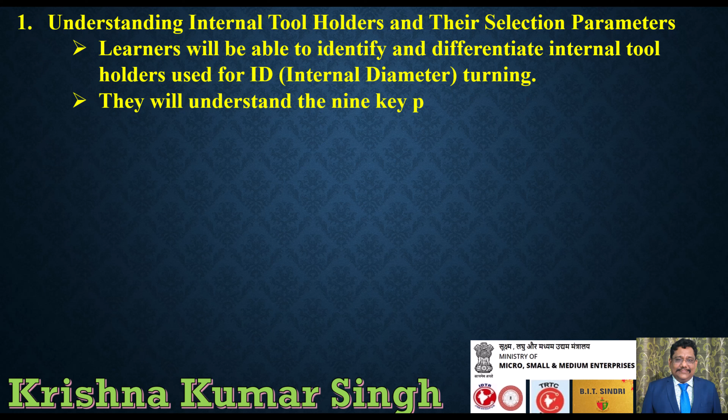Outcomes of the lecture on internal tool holder selection and insert grades. Understanding internal tool holders and their selection parameters. Learners will be able to identify and differentiate internal tool holders used for ID, internal diameter, turning. They will understand the 9 key parameters involved in selecting internal tool holders.

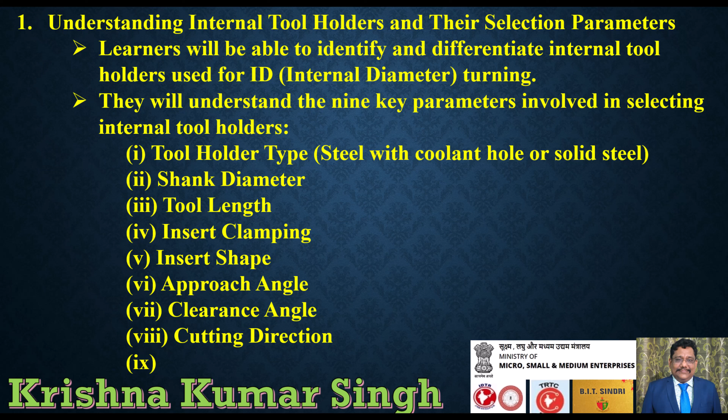The 9 parameters are: 1. Tool holder type, steel with coolant hole or solid steel. 2. Shank diameter. 3. Tool length. 4. Insert clamping. 5. Insert shape. 6. Approach angle. 7. Clearance angle. 8. Cutting direction. 9. Cutting edge length.

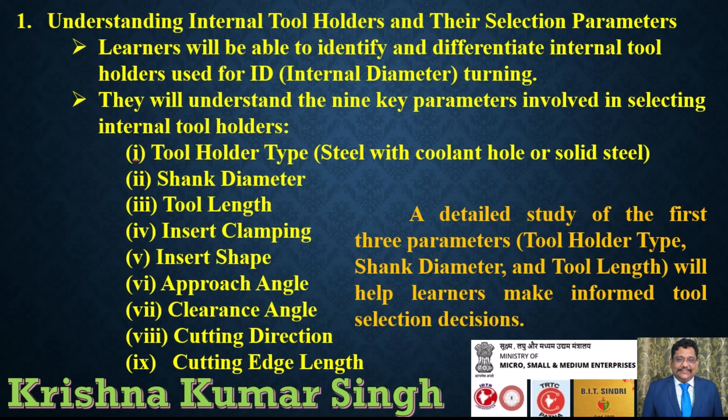A detailed study of the first 3 parameters, tool holder type, shank diameter, and tool length, will help learners make informed tool selection decisions.

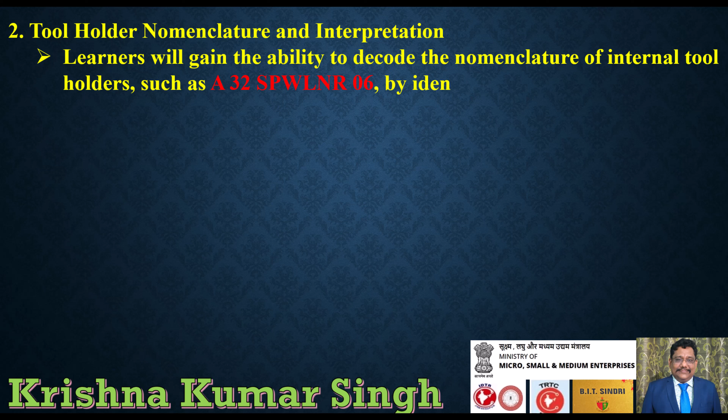Tool holder nomenclature and interpretation. Learners will gain the ability to decode the nomenclature of internal tool holders, such as A 32 SPWLNR 06, by identifying each component: A steel bar with a coolant hole, 32 shank diameter, 32 millimeters, S tool length, 250 millimeters.

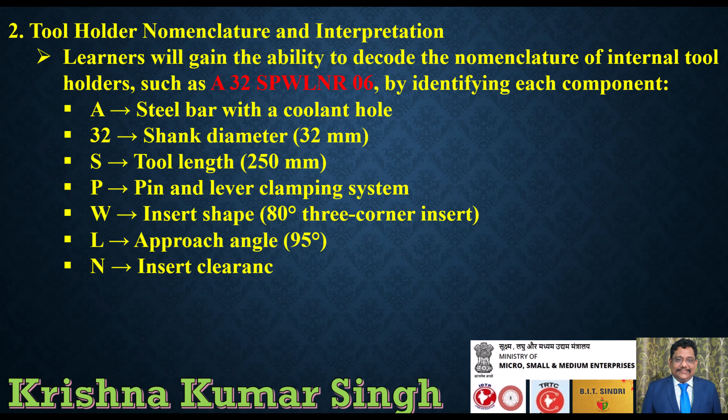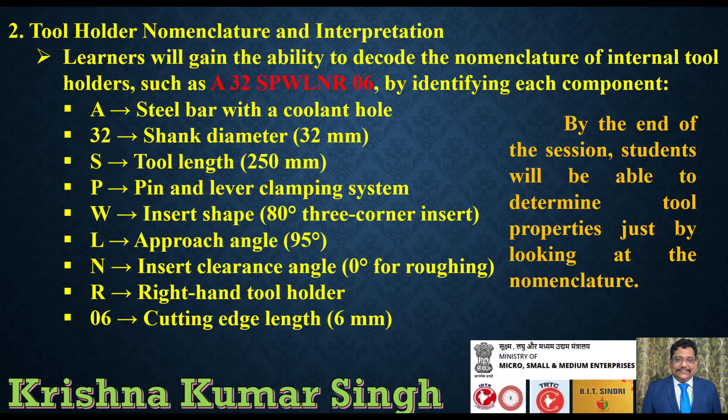P pin and lever clamping system, W insert shape, 80 degrees 3-corner insert, L approach angle, 95 degree, N insert clearance angle, 0 degrees for roughing, R right hand tool holder, 6 cutting edge length, 6 millimeters. By the end of the session, students will be able to determine tool properties just by looking at the nomenclature.

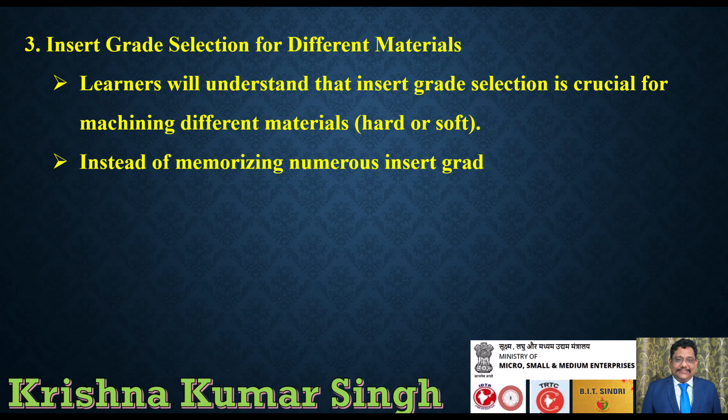Insert grade selection for different materials. Learners will understand that insert grade selection is crucial for machining different materials, hard or soft. Instead of memorizing numerous insert grades, students will be encouraged to observe and document the insert grades used in their workplaces for various materials. They will recognize that insert grades are predetermined by manufacturers based on extensive testing and recommendations.

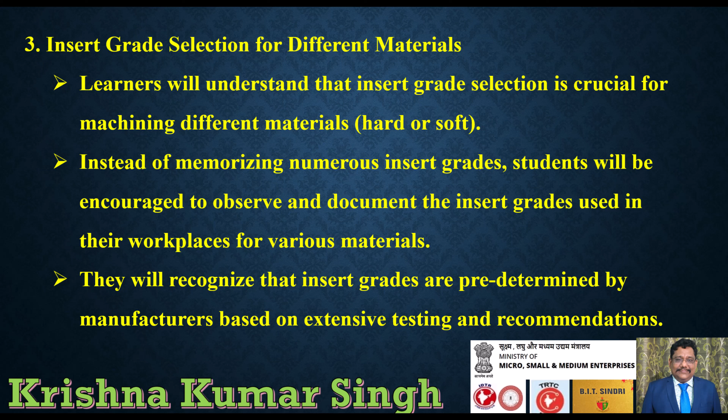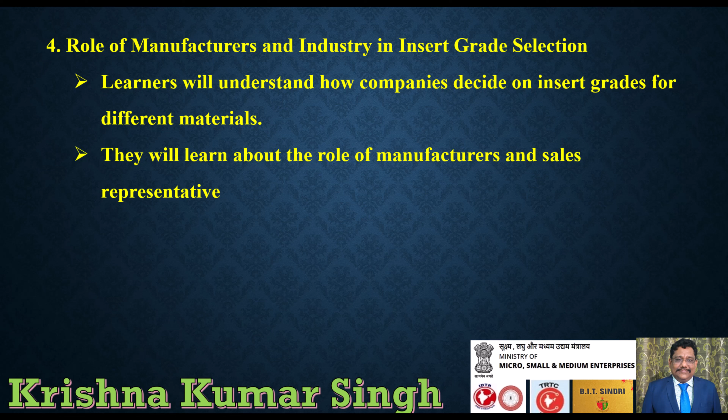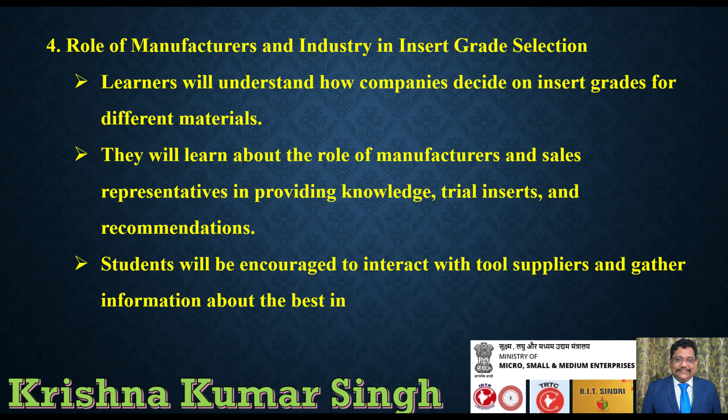Role of manufacturers and industry in insert grade selection. Learners will understand how companies decide on insert grades for different materials. They will learn about the role of manufacturers and sales representatives in providing knowledge, trial inserts, and recommendations. Students will be encouraged to interact with tool suppliers and gather information about the best insert grades for their applications.

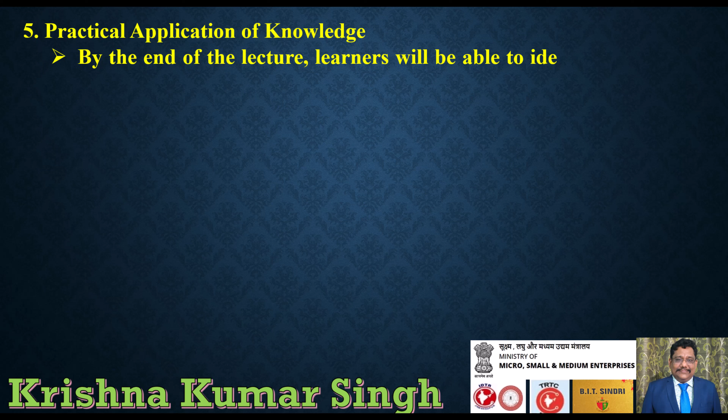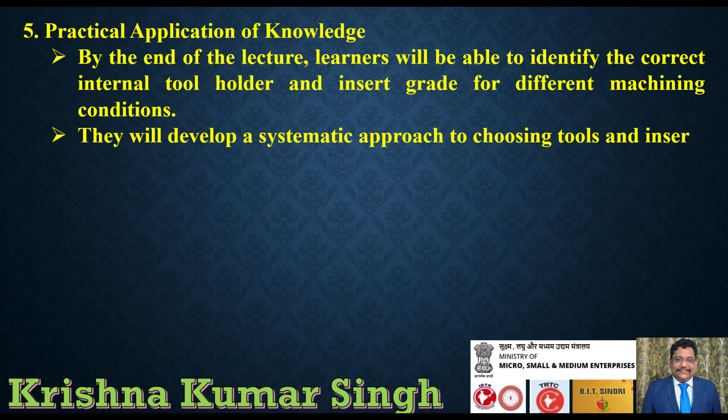Practical application of knowledge. By the end of the lecture, learners will be able to identify the correct internal tool holder and insert grade for different machining conditions. They will develop a systematic approach to choosing tools and inserts based on workpiece material, machining operation, roughing or finishing, cutting parameters.

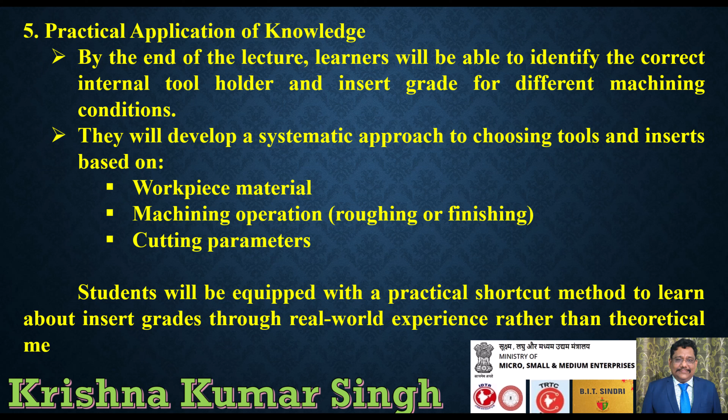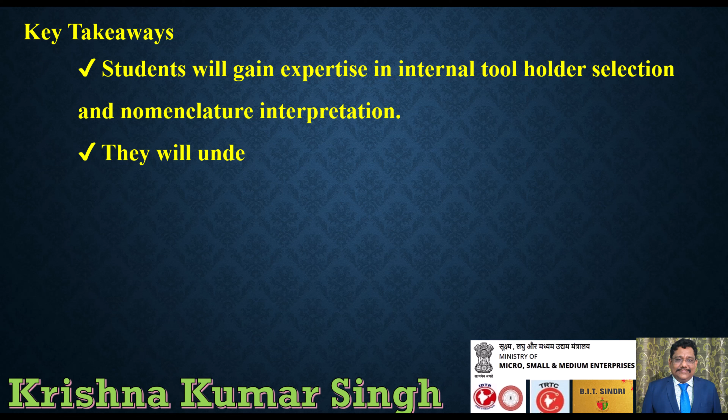Students will be equipped with a practical shortcut method to learn about insert grades through real-world experience rather than theoretical memorization. Key takeaways: students will gain expertise in internal tool holder selection and nomenclature interpretation. They will understand how insert grades are chosen and how to acquire knowledge through experience. The lecture will provide a structured, industry-relevant approach to tool and insert selection.

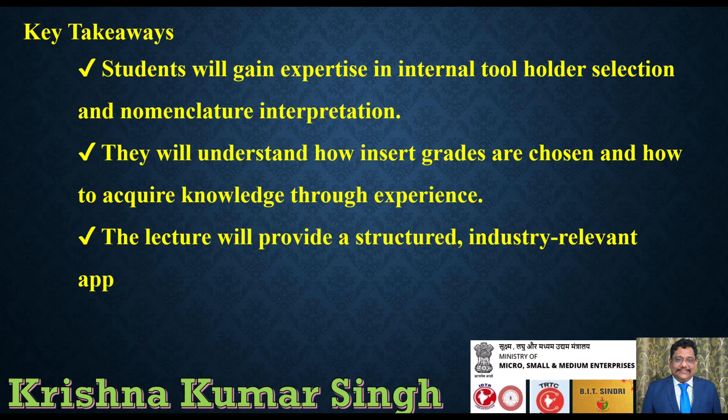Internal tool holder selection. That means tools which are used for ID turning are internal tools. To select these tools, we have 9 parameters. First is tool holder's type. Second is shank diameter. Third is tool length.

Fourth is insert clamping. Fifth is insert shape. Sixth is approach angle. Seventh is clearance angle. Eighth is cutting direction. And ninth is cutting edge length.

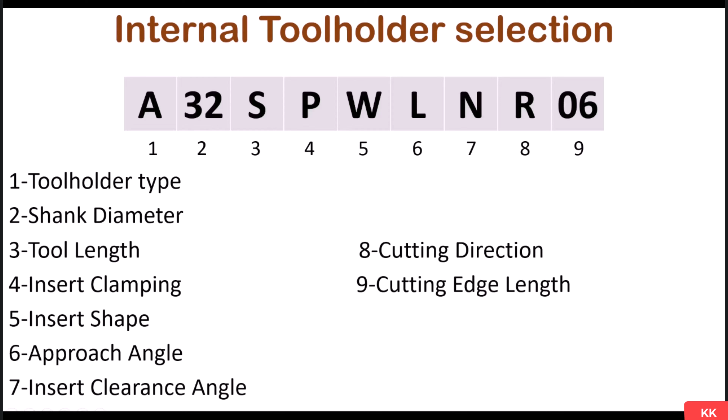As you can see here, only the first 3 are unknown, the remaining we have already seen. So let's see these 3 in detail. First parameter is tool holder type.

We have 2 types of tool holder. First is steel with coolant hole, and second is solid steel. Steel with coolant hole means we have a hole for coolant. As you can see in the picture, this type of hole is there in steel with coolant hole, as this tool is used for ID turning. During ID turning, a large amount of heat gets produced, and this may damage our tool. So to avoid this, we have coolant holes. The next type is solid steel, which doesn't have coolant holes.

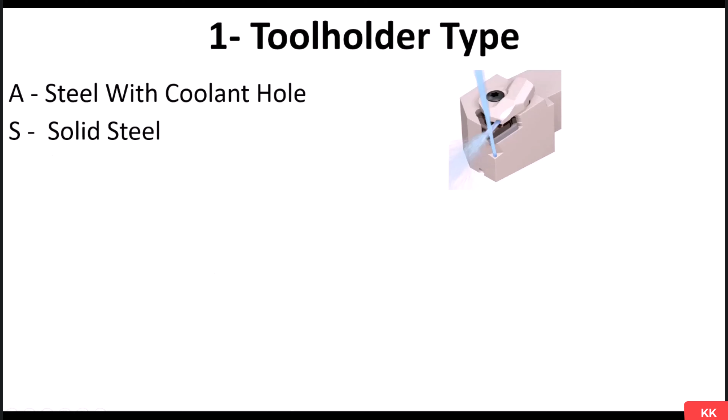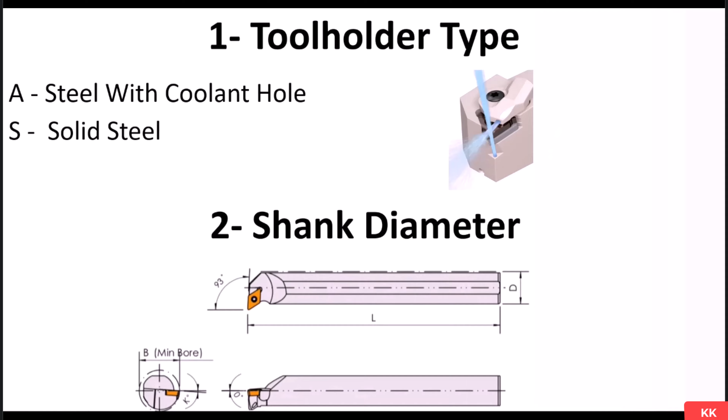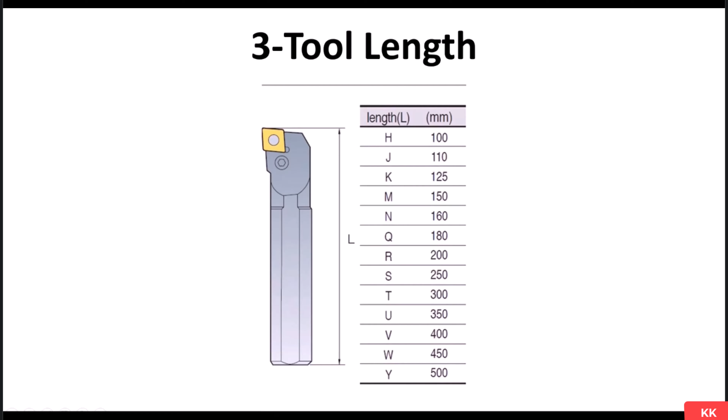Our next parameter is shank diameter. Now you know what shank is, so the diameter of that shank is our second parameter. Our next parameter is tool length. This is tool length, and it is also divided into some grades, so look at this chart for tool length. All other parameters we have already covered earlier. So let's see one example for an ID tool holder.

A32 SPWLNR06. A is steel bar with hole for coolant, meaning hole is present in this tool holder. Our next parameter is shank diameter, so the diameter of that shank is 32 mm.

Third parameter is tool length. S means 250 mm tool length. P is pin and lever clamping system, which we have seen in external tool holder. W is insert shape, so it's 80-degree three-corner insert.

L is approach angle, so L has 95-degree approach angle. We also have J, which has 93-degree approach angle. N is insert clearance angle, having 0-degree clearance angle, meaning it will be used for roughing. R is right-hand direction or right-hand tool holder, and 06 is 6 mm cutting length.

So the first three remaining, all we have already learned. Now try with these two examples. From now, just by their names, you will get to know every detail property of that tool or insert. So here we have completed nomenclature of that insert as well as tool holder. Now you will see this is only nomenclature of tool holder or insert, meaning we are getting every detail about insert or tool holder just by looking at their names.

But how to select tool or insert? If we have hard material, which insert grade do we have to choose, or if we have soft material, which insert grade do we have to use? So how can we decide this? You get this knowledge of which insert grade is useful for hard material or soft material only by experience.

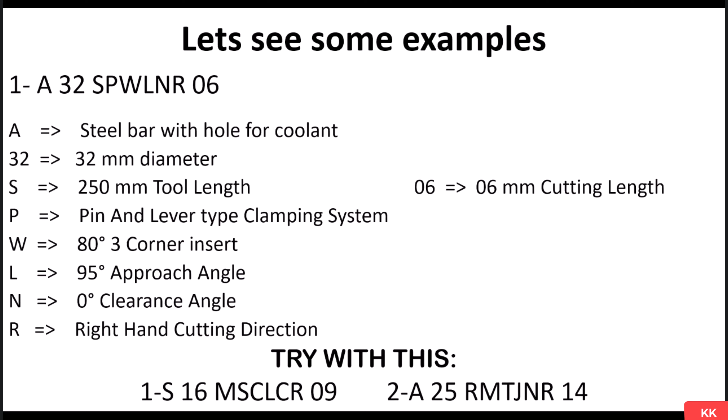The company who manufactures inserts knows everything about their insert. So salesmen of that company visit different companies and give information about their inserts, whether the insert is good for hard material or soft material. They also offer some free inserts to the company for trial. As the company gets free inserts, they accept it, and if they get good results from that insert, they continue to use that insert or insert grade for that material. This is how insert grades are already decided by companies for different materials.

So you only have to collect all this information about insert grades, and you will get this knowledge only by experience. From now, you have to see which insert grade your company is using for which material.

So here we have learned nomenclature of insert and tool holder as well, and I told you one shortcut way to get knowledge about insert grade. So this is all about nomenclature and selection of insert grades and tool holders.